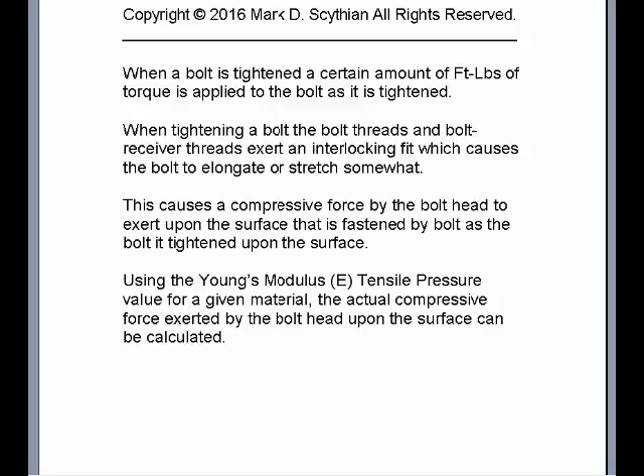Using the Young's modulus E tensile pressure value for a given material, the actual compressive force exerted by the bolt head upon the surface can be calculated. The Young's modulus E tensile or compressive pressure in pounds per square inch represents the maximum pulling or pressing a given material can tolerate before it will yield or permanently deform preceding failure of the given material.

Young's modulus E is equal to stress divided by strain, where stress is the force, compressive or tensile, divided by the cross-sectional area of the material in either metric or US units, which we'll cover in a second. The tensile or compressive force divided by the cross-sectional area represents the stress, and the strain is the elongation or compression divided by the length of the material. So that's stress divided by strain mathematically illustrated.

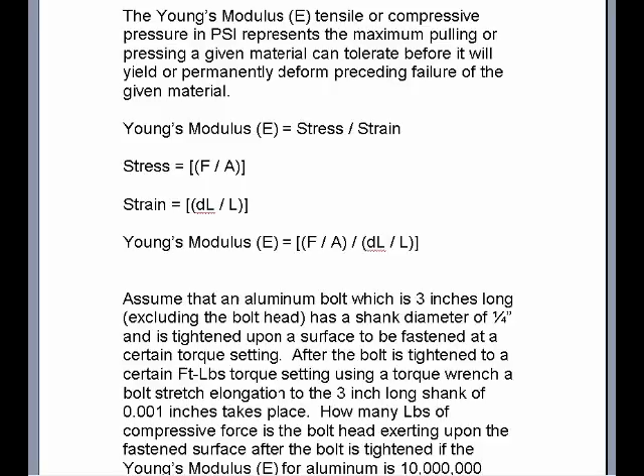So assume that an aluminum bolt, which is 3 inches long, excluding the bolt head, has a shank diameter of 1/4 inch and is tightened upon a surface to be fastened at a certain torque setting. After the bolt is tightened to a certain foot-pounds torque setting using a torque wrench, a bolt stretch elongation to the 3-inch long shank of 0.001 inches takes place. How many pounds of compressive force is the bolt head exerting upon the fastened surface after the bolt is tightened if the Young's modulus E for aluminum is 10 million psi?

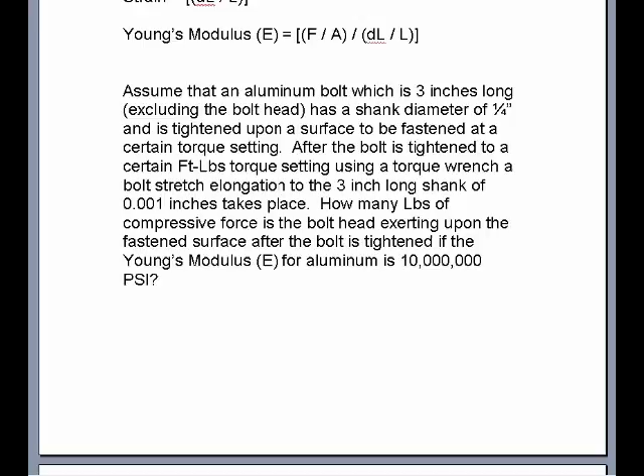So we go to the formula again. Young's modulus E is equal to the tensile or compressive force divided by the cross-sectional area as the stress, divided by the strain, which is the elongation or compression divided by the effective length. So if we define the terms, E is the Young's modulus tensile pressure in pounds per square inch or pascals. That's US and metric values. Either or, you've got to keep them consistent.

Tension or compression force in pounds or newtons is the F. The A represents the cross-sectional area of the material in square inches or square meters. DL is the elongation or compression in inches or meters. L is the effective length of the material in inches or meters.

So we start with a Young's modulus E for aluminum of 10 million psi. Cross-sectional area is just pi r squared, so we take the diameter of 1/4 inch, 0.25 inches, divided by 2 to get the radius, square that times pi, and that turns out to be 0.049 square inches of cross-sectional area to the bolt. And then there is an elongation, when tightened, of the bolt shank of 0.001 inches, and then the effective length is the shank of the bolt excluding the head, which is measured at 3 inches. So L is equal to 3 inches.

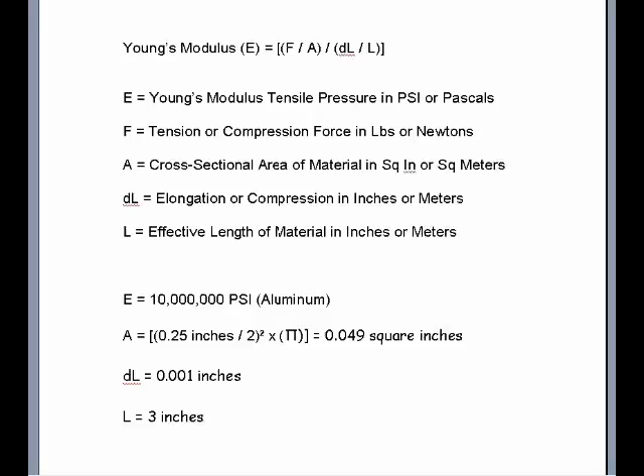So all we have to do is algebraically calculate it out. We just plug in all the values we know, the Young's modulus E, we don't know the force, divided by the cross-sectional area, the elongation, and the length. Then we can solve for the denominator. And then after that, when you multiply the 10 million times the denominator, you get the numerator, right? So you can just multiply the 10 million times the denominator and then equal it to the fraction of F over 0.049.

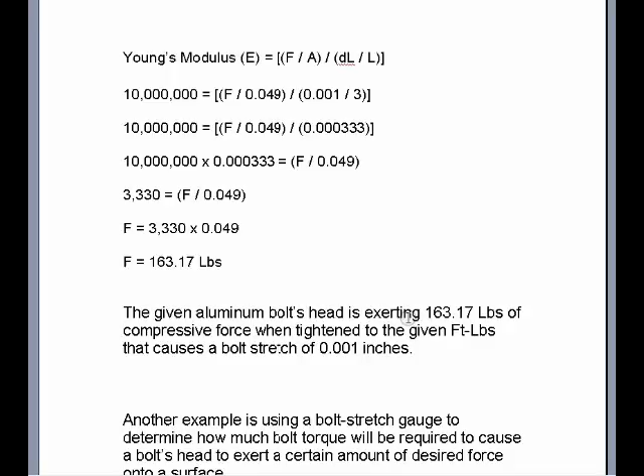Then when you do that, the 10 million times this value becomes 3330, and then you just solve for F. So when you do that, you get this final computation: 163.17 pounds of compressive force. So the given aluminum bolt's head is exerting 163.17 pounds of compressive force when tightened to the given foot-pounds setting that causes a bolt stretch of 0.001 inches to the 3 inches of shank.

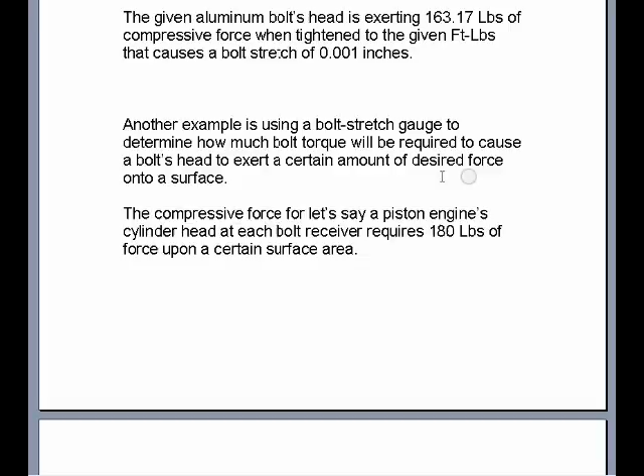Another example is using a bolt stretch gauge to determine how much bolt torque will be required to cause a bolt's head to exert a certain amount of desired force onto a surface. The compressive force for, let's say, a piston engine cylinder head at each bolt receiver requires 180 pounds of force upon a certain surface area. The technician can take the given bolt, install it into a bolt stretch gauge, and use a torque wrench to tighten it until the desired bolt stretch takes place, measured by the bolt stretch gauge itself.

The desired bolt stretch is first computed by using the Young's modulus formula. Given the compressive force needed, F, solve for the bolt stretch DL required based on the Young's modulus of the given material E, cross-sectional area of the bolt A, and length of the bolt L, excluding the bolt head. When the bolt is screwed into the bolt stretch gauge and tightened with a torque wrench, and the desired bolt stretch is reached, as measured by the gauge, then the foot-pounds torque at the torque wrench is measured.

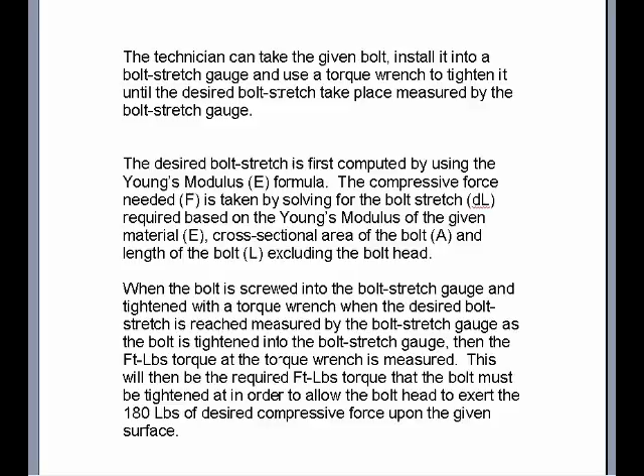This will then be the required foot-pounds torque that the bolt must be tightened at in order to allow the bolt head to exert the 180 pounds of desired compressive force upon the given surface, in this case the piston engine cylinder head, at that point where the bolt is to be installed.

So any one of those variables can be solved with the Young's modulus formula, tensile pressure, once you get the E of the material you're working with. And this is very valuable if you want to figure out the bolt stretch or how many pounds of actual force the bolt head is exerting on a surface when it's tightened upon it.